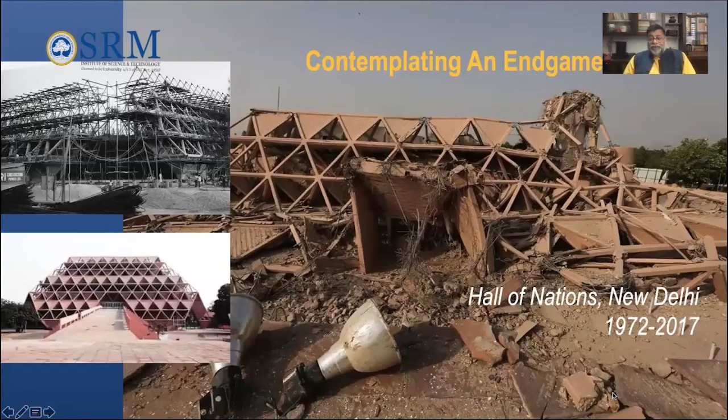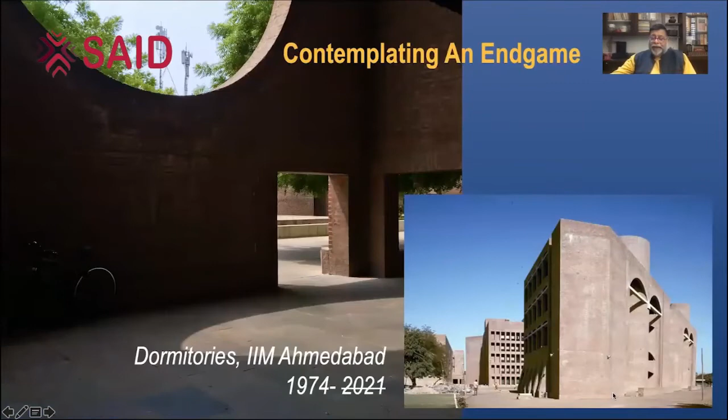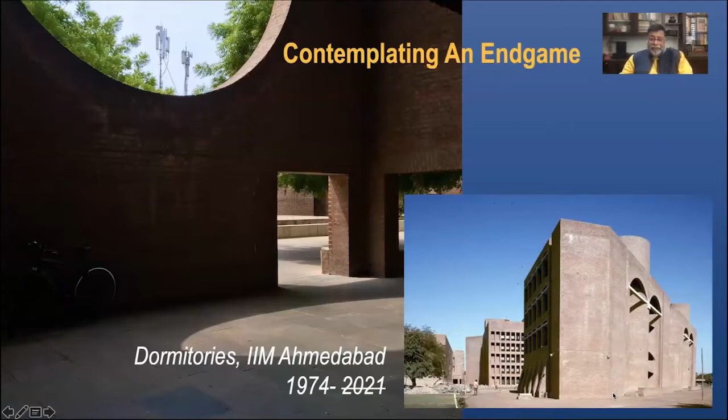We will extract more minerals from the ground for our cement, sand, steel, aluminium, bricks, glass, and of course the coal and the oil. But the supply is not infinite, and it is progressively getting harder to reach. How long can our resources last? How long can we sustain this way of building?

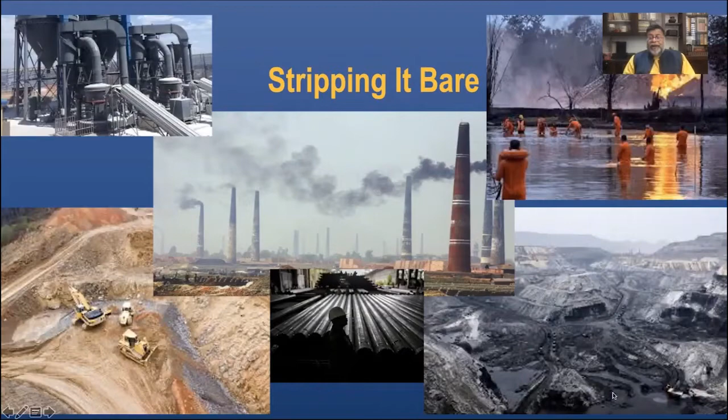Sustainability is the catchword today in architects' offices, but the reality is different. For conscience keeping, we have devised metrics which console us that our buildings are sustainable. But actually, these ratings measure how relatively unsustainable our buildings are. We learn how to build so that we can comply with these goals. But these are just baby steps. Real sustainability is quite far. These are some of the most highly rated sustainable buildings in India today.

Do we see anything different here? Anything which shows us a way to build in the future, which will be less resource intensive? No. The message is that it is business as usual. Nothing has changed. What we are missing out on is the ultimate demise of these buildings, a fact which we do not contemplate and the rating systems do not capture.

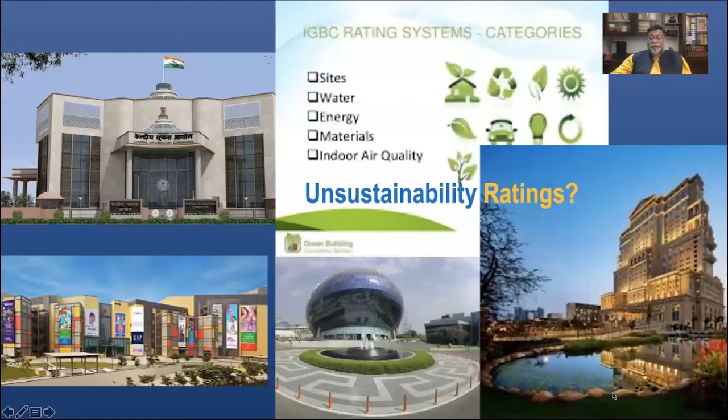But we do not think of buildings in the same way. We do not bother about this because our work stops when a building is up and running. But if the building was not to stay forever, then how should it end? For 50 years, we have chattered about this simple 3-word mantra: reduce, reuse, recycle. Yet, we do very little about it in our design practice.

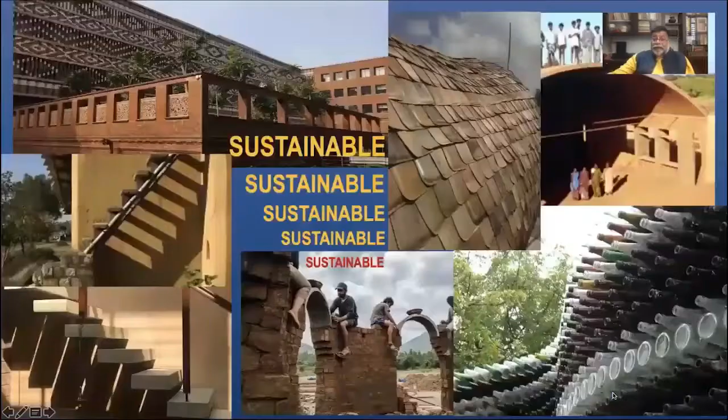In our studios, we are still stuck with form follows function. Even after sustainability has become such an issue, it is still not the essential basis of our design concepts. It is an extra layer, a veneer. That's not to say that there are not things happening in practice, notable exceptions. But we wish that they were the rule. For the rest of us, the alternatives were always clear, but our gaze was unseeing.

Why? One of the major reasons could be our conditioning at architecture school. When creativity is underlined as the bedrock of our work, with so much emphasis always on being new and different, we get kitted out as creators or makers. We come to believe that there will be an endless demand for more buildings, waiting for architects to create them. That is what we train for. We obsess with building new buildings on clean sites. We lionize originality, but we end up doing mostly the same things.

So here is my proposition. Positive changes in our built environment will not come without repurposing the architect's education to prioritize the attainment of sustainable development goals as the primary objective. At least the 5 sustainable development goals most relevant to our domain require a strong push of capacity building to get architects to deal with them proactively and have some kind of long-term impact. How do we begin?

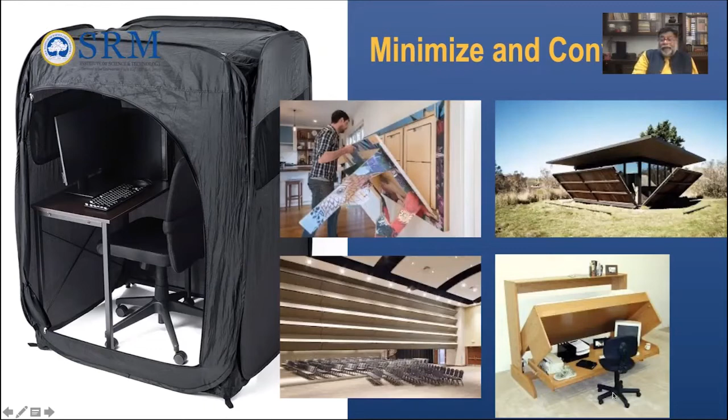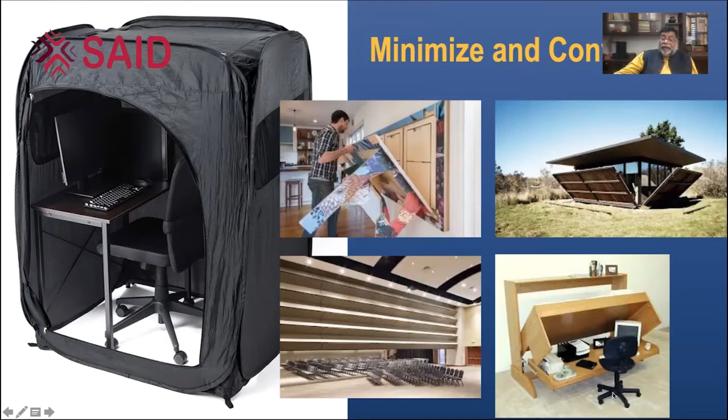In the tech-enabled post-pandemic environment, many of our space conventions and standards could change. Some types may reduce or even disappear, and some new typologies may emerge. We have learned to optimize our space with the help of folding furniture, folding partitions, folding walls, and new devices like the work from home tent. Less is more has come into everybody's homes, but it should ideally come from our architecture schools and become aspirational in the public perception. That's the only way it can be ingrained in the architectural profession.

When an object stops being useful, it is replaced by a gleaming new object suited for some new purpose. But can the old object mutate into a new one? This opens the door for the second alternative, reuse. Carl Elefante, the president of the American Institute of Architects in 2018, has said, the greenest building is the one that's already built. It has already added to the carbon footprint. The environmental price has already been paid.

Wouldn't it make a lot of sense to use it thoroughly so that we can extract the best result out of it? Why spend on a new building if we can remodel an old one? If we must contain the spread of our cities, the urban sprawl, we should redeploy our building inventory and selectively redensify the inner core if necessary. It certainly helps if we can find disused or underused buildings to convert.

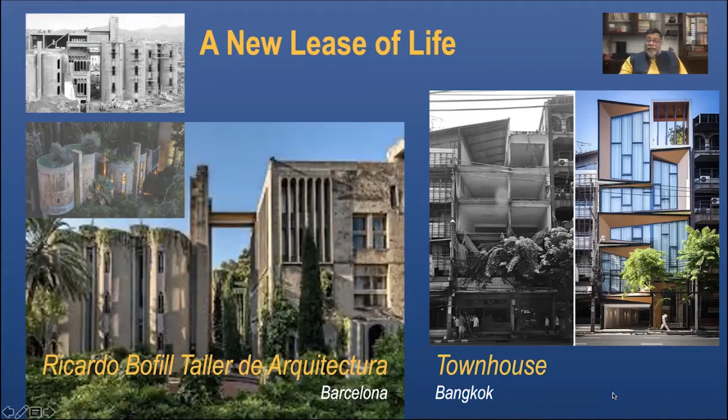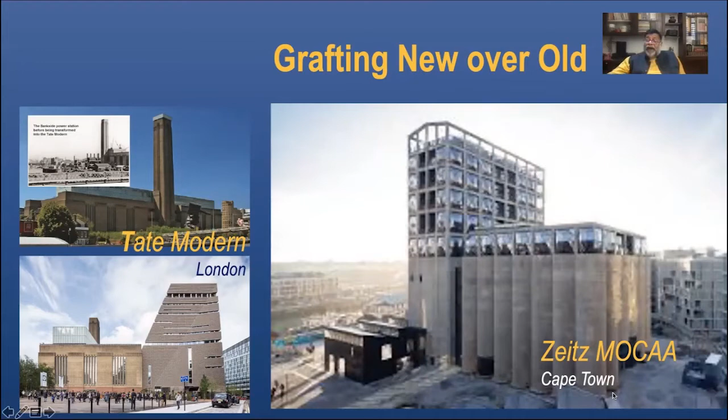Ricardo Bofill the Senior took the initiative many decades ago and inspired many architects to follow his lead. That in turn impressed many clients to think differently. And on a positive note, we can say that this was one good thing which happened. Across the world, industrial buildings were built tough. They have lasted longer than their designed function and are now finding more interesting public uses. These buildings have the charm of history. More and more, they are being transformed as places for the arts, as if to compensate for the hard life in their previous avatar.

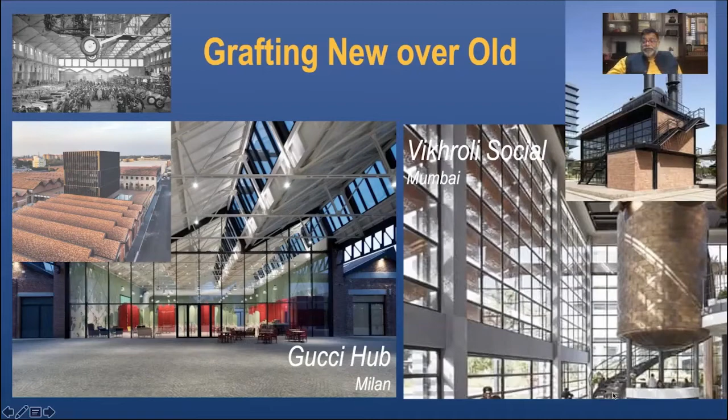Retrofitting becomes fashionable here at Gucci's headquarters in Milan. Besides becoming lifestyle statements, makeovers like Vikhroli Social at Mumbai make a lot of commercial sense too. They also upgrade their sooty neighborhoods. This castle in Spain, in the town of Baena, when it ended its first life as a military establishment, got a second one as a water supply facility, a water tank, sitting at the highest elevation in the town. Now, when it has outgrown the second one also, it has got a third life for being just what it is, a survivor of the golden olden period.

Very sensitively, the conservationist has given the old core a new armature on which new public activities can be mounted. What is it going to be? We don't know. Awestruck, the city is still undecided how best to use it. It is so good. As it happens, alteration and addition is a booming business, virtually at par with new buildings in intensity, if not in value.

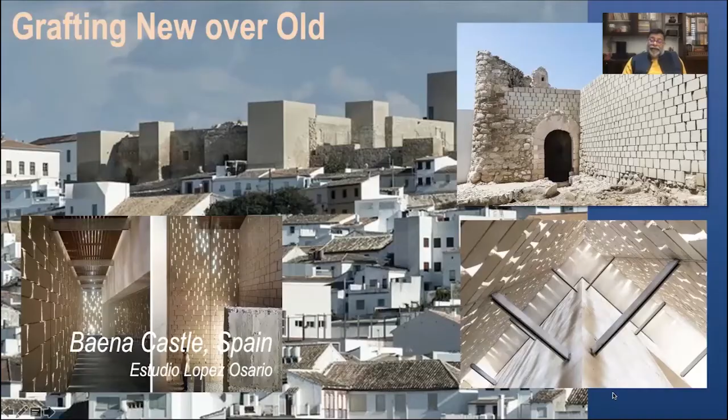Likewise, in the classroom, the same basic principles which inform new building design should be exercised for retrofitting of old buildings and grafting additions onto them. Professionally, it is a very useful skill and mostly acquired by unlearning after graduation. However, there is an elephant in the room. There is a dilemma we do not want to talk about. We are so deeply invested in the personality of our designs, how our baby is going to be, that we shudder to think of its demise, that someday it might cease to be. Maybe that's the reason why industrial and military buildings are so amenable to retrofit, because they are impersonal. They are nobody's baby.

Times have changed. Buildings today are not just shells. They are no longer inert monoliths, frozen music to be admired in sunlight and enlivened by tourist footfalls. They are more machine like, complex products of many technologies. Unfortunately, they will also reach an end of life beyond which extension will be unviable. But unlike the ships at Alang, we cannot easily break up contemporary buildings because of the way we build them. Unlike ship breaking, building breaking is utterly wasteful.

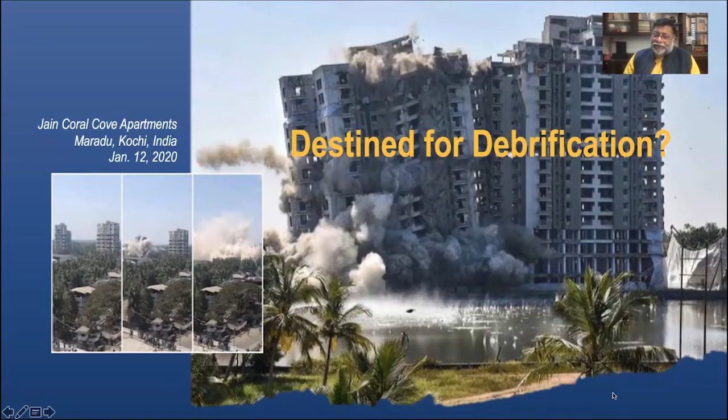Urban skylines are dotted with tower cranes, but the ground is blotted with heaps of construction and demolition debris. The debris has a nasty habit, it does not vanish. It just shifts to a landfill site, which is probably a precious lowland for aquifer recharge. The earth is done for. Take it or leave it. How big is this problem?

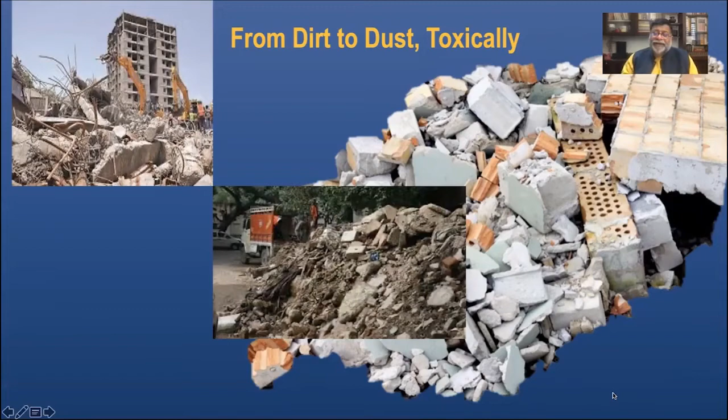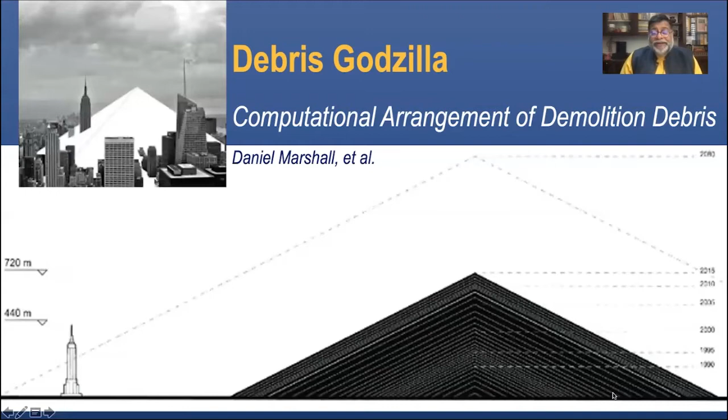We don't have data for India, but we may look at some telling graphics by Daniel Marshall in their paper, Computational Arrangement of Demolition Debris, where they have analyzed the situation in the United States. The demolition debris produced in New York is represented as a pyramid, a hill. See the size of the debris hill in comparison to the Empire State Building. See how much it has grown between 1990 and 2015. Today, it stands at 720 meters compared to 440 meters to the tip of the Empire State Building.

Highlighting the enormity of the problem, the paper also suggests a logistic solution. It shows how even random pieces of debris can be recomposed to create new wall and roof elements. But more interesting is the idea of a store or an exchange where they can be deposited till somebody buys them off for their new buildings. These stores are just like any other retail outlets with fancy lighting and window display, if you may.

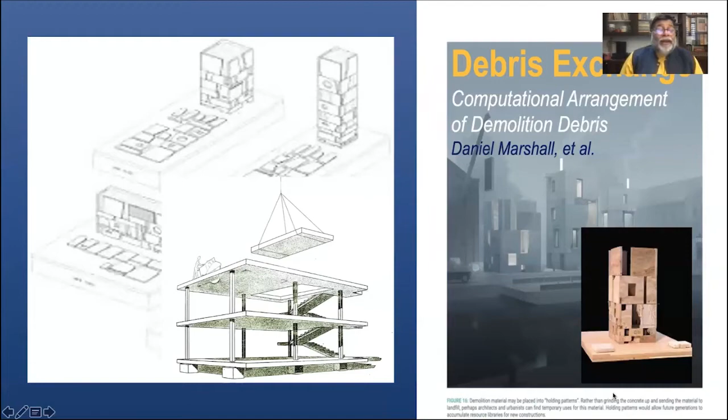Sure, it would make a lot more sense to cut the building into standard size rectangular pieces instead of actually breaking it, as we can see with the saw going over this domino house. If thinking of the death of one's baby was difficult, dismembering its parts and selling them off is unthinkable. But we can disengage from the object and focus on its matter.

If a material refuses to die, or it should not be returned to the womb of Mother Earth, then it would be better that it lived on. Let us think of it like an organ bank. At the end of a building's useful life, it may be only that particular assemblage of its parts which may become dysfunctional. The parts themselves may live longer if they are not destroyed by the crude process of demolition.

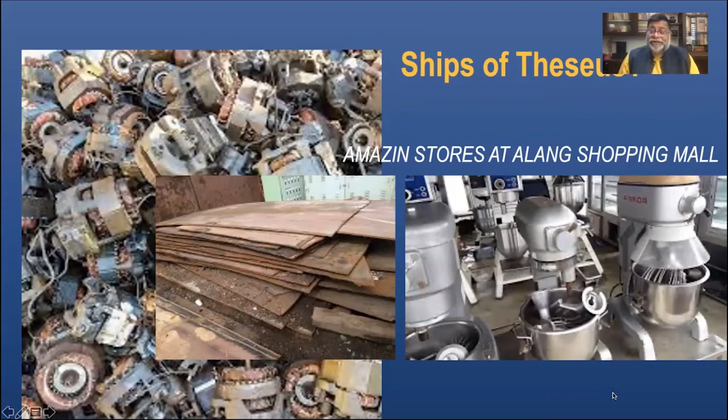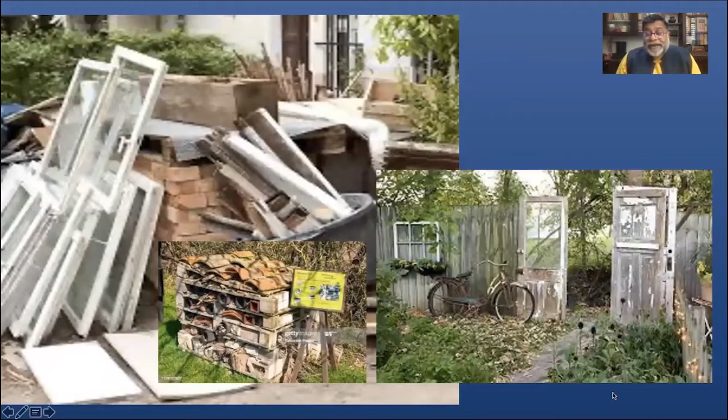In opting to recycle, our designs can script in the demise of a building and its transition to a new life as a cycle of building and unbuilding. But we carry existential baggage. The problem of unbuilding, nurtured in our design learning, must be proactively, forcefully eased out. If the entire building is not reusable, it can still yield some components which can be reused. But the stigma of second hand will not go away. So what to do? This is another alternative.

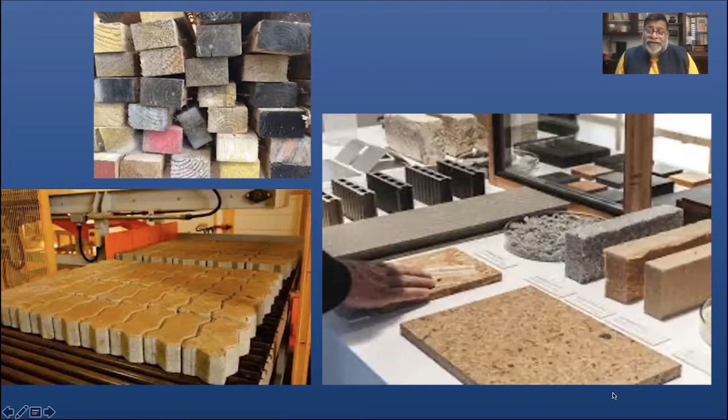We can crush that building, and with the debris, we can make raw material for absolutely new building parts. Even this could give us tremendous environmental saving with less mining for materials and less energy consumed in converting them into building parts. But what if there was a third way in which we could salvage everything from a dismantled building? Design for disassembly or DFD can be a game changer. If incorporated in our design concepts, it can take us across the old versus new divide.

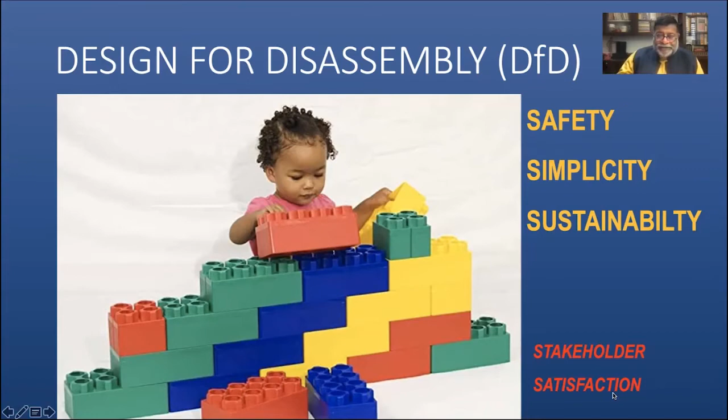Obviously, disassembling a building in an orderly manner to recover all of its parts has much to do with how it is put together in the first place. It is just like Lego bricks. Porta cabins we have been using for a long time. These temporary structures are built and taken down quickly to be moved to a new location and re-erected again. We make them look like they are permanent. But somewhere along the line, we forgot that even permanent structures can be made that way.

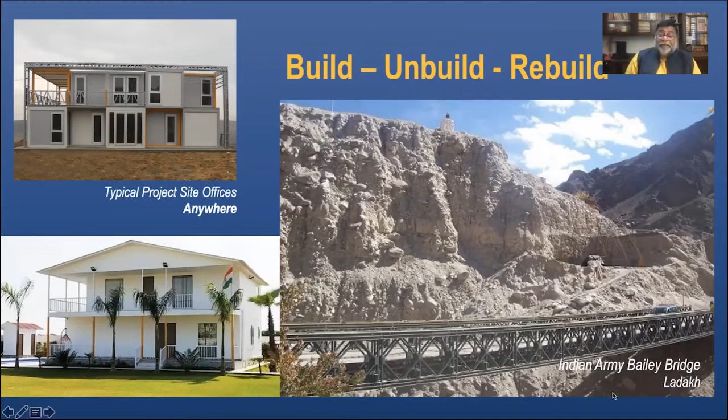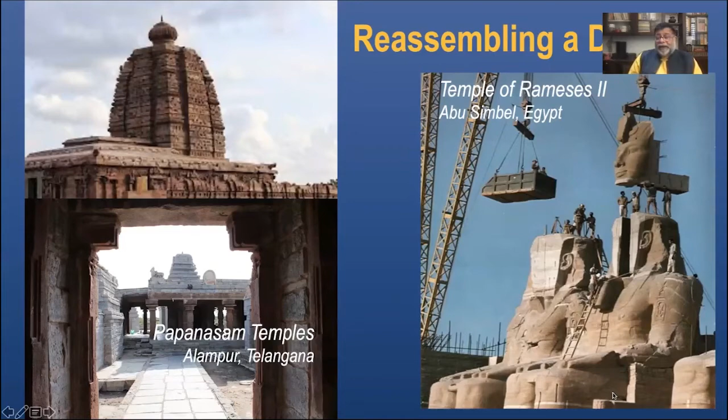By itself, it is not a new concept. It is quite ancient, predating the ubiquity of cement mortar. Our magnificent edifices have been created without mortar, with excellent dry joints that speak of the superior craftsmanship and metallurgy that we had in the olden days. Thanks to this, entire temples have been moved piece by piece from one location to another and saved from submergence in dam waters, like at the Sri Sailam Reservoir in Telangana and the Aswan Dam in Egypt.

Adam Hardy has conjectured a reconstruction of a temple from only its scattered remains by deciphering the key to fitting and joining the stones. Even when it was not a design intent to dismantle this temple or to rebuild it, it has been proved here that it can be put together back again. Such is the inherent simplicity of the technique. This is like eternal sustainability.

If our building designs could be embedded in a circular economy, we can use resources for as long as possible, extract the maximum value from them during their useful life, then recover products and regenerate materials at the end of each life cycle. The carbon investment already made in processing them pays back repeatedly when building components can be assembled and disassembled with equal ease to be used in different buildings over time.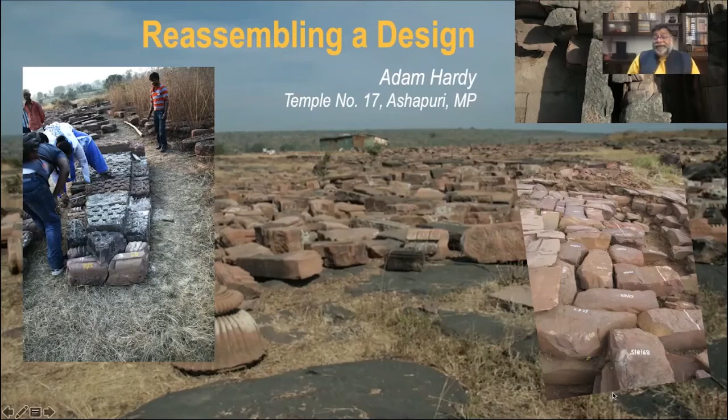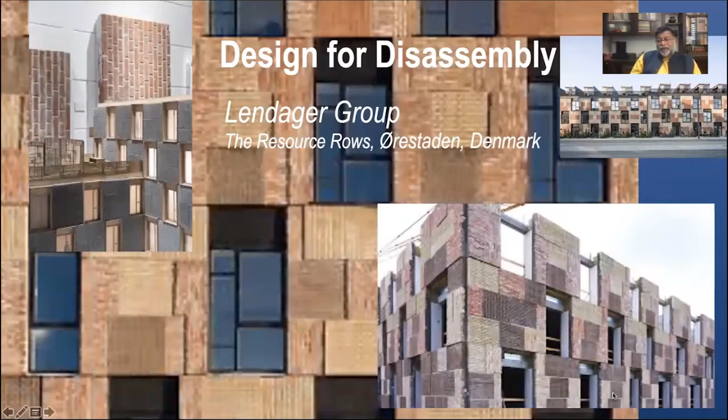Let us see what is the state of art today. Some architects are showing the way forward. "We aim to be thinking of the next 5 projects these materials could construct while we are designing." So says Anders Lendager of the Lendager Group Copenhagen, who do a lot of work on sustainable architecture. This is one of their examples, the Resource Rows, Ørestaden, Denmark. And you can see how recycled materials have been used to produce wall panels. This is a process fully integrated in their design build approach.

Kengo Kuma has spent a lifetime fighting against the tyranny of cement and concrete with alternatives based more on natural materials. This is showcased in the ICU Physical Education Center at Tokyo. This building is made almost entirely of wood, parts joined with nuts and bolts, skillfully concealed with meticulous detailing. It can be taken apart just the way it was put together.

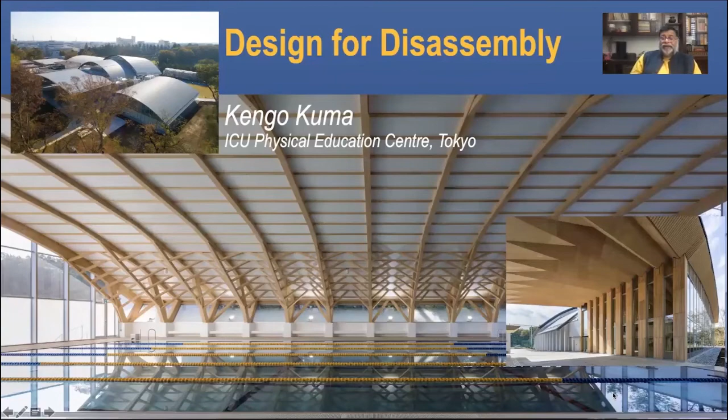To relate more to our mainstream architectural work with multiple floors, large floor plates, light wells, staircases, etc., we have RAU Architects' Triodos Bank building at Zeist, Netherlands. It is a manifestation of an unusual meeting of minds between the architects and the client, who is a major financier of sustainability projects.

This informs all aspects of the design, starting from the choice of the site itself. If God is in the details, RAU architects show the direction where to go to find him. The details take on an entirely new set of challenges for civilized unbuilding. For end of life disassembly, they have made a catalog of all the parts, including every single screw, all 165,312 of them. Loads of work, but it is worth it.

I urge that in our studios at school, we look at architectural design in more holistic terms, end to end, cradle to cradle, with the life in between marked by flexibility, adaptability, and responsibility to the environment. We spend all the time in figuring out how to build the building. Just as much attention could be given to how it will be unbuilt.

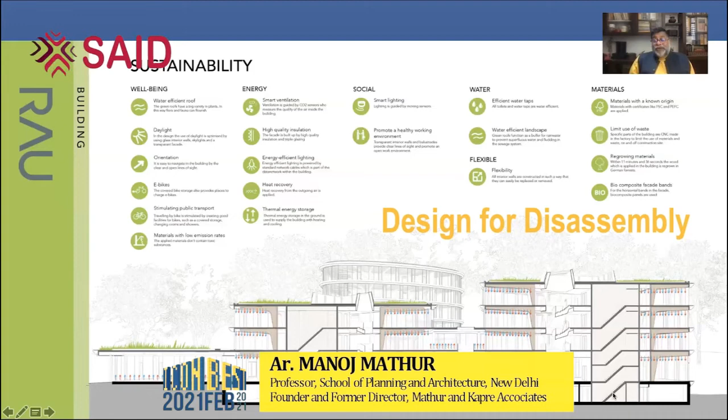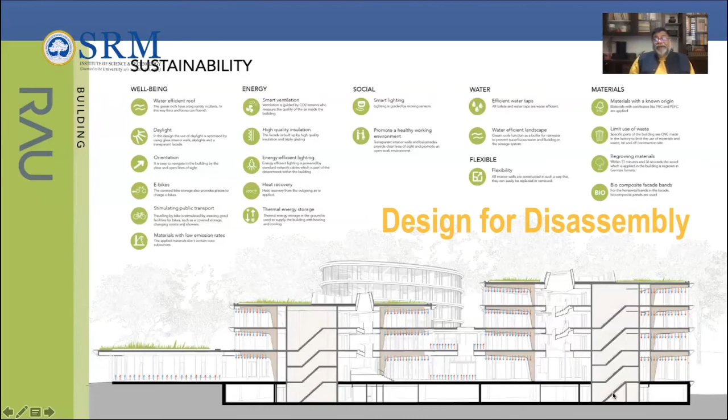We can turn the tide towards real sustainability only when we achieve the critical mass of architects educated in this progressive ethos. A student's introduction to architecture should no longer be as a self-indulgent expression of individual creativity, but as a much more responsible medium to help humanity live in harmony with nature. Otherwise, we will be like this only.